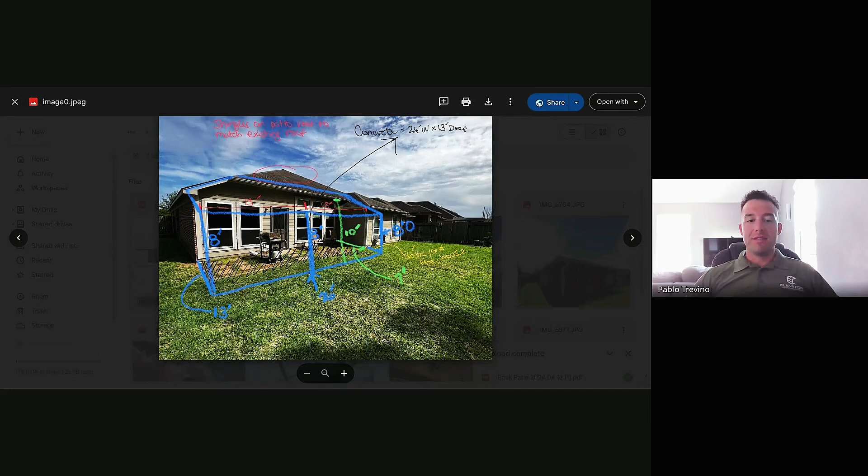The concrete that we laid it all on was stamped concrete. I think the unique thing about this project was, you see a lot of patios with the broom finish with a picture frame layout and stuff like that. Yeah. But it's a unique style of concrete that you can make look like it's brick. You can make it look like it's stone. You can put different colors in it. So that is even better that now I can see that.

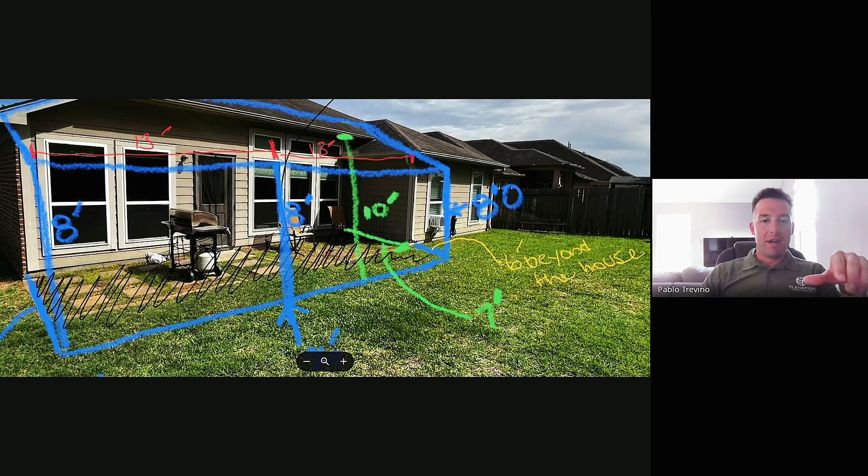So we had our columns that are all right there. Did we do 4 across? We'll see in the photos, but I think we ended up doing 4 columns. Yeah, originally I think we wanted to do without that, but for cost purposes, because of how expensive the beam was to go that distance, we ended up putting an additional post or 2 in there, so that way we didn't have to go with that type of a beam.

Yeah, and as you can see, there's no concrete here, and we typically don't draw out every single project, but as you can see up here, the roof is just so unique. To tie into that roof was complicated, so we wanted to make sure that we had the drawings so our guys can know exactly what they're building towards.

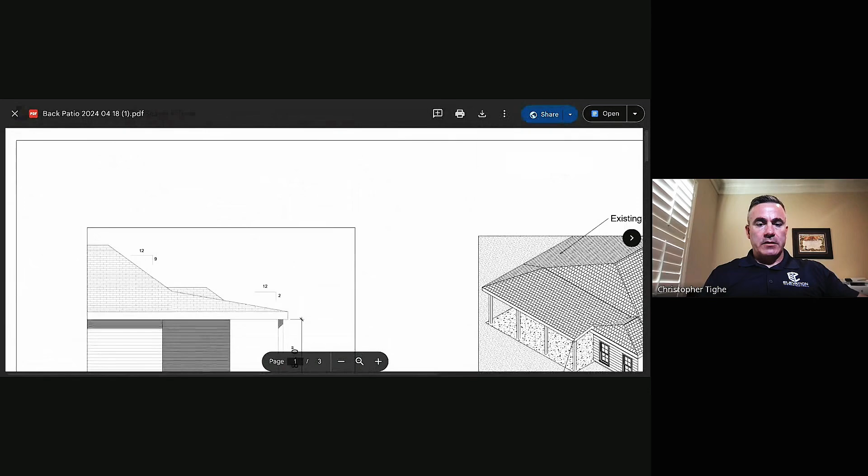Let's see here. So I've got the drawing. Here we go. So here's the drawing. Like I said, we don't do this for every single project, but for this one, we felt it was necessary so we can give it to our team who is actually going to build it, and they can see exactly what we're going to do. So we did the 4 columns right there.

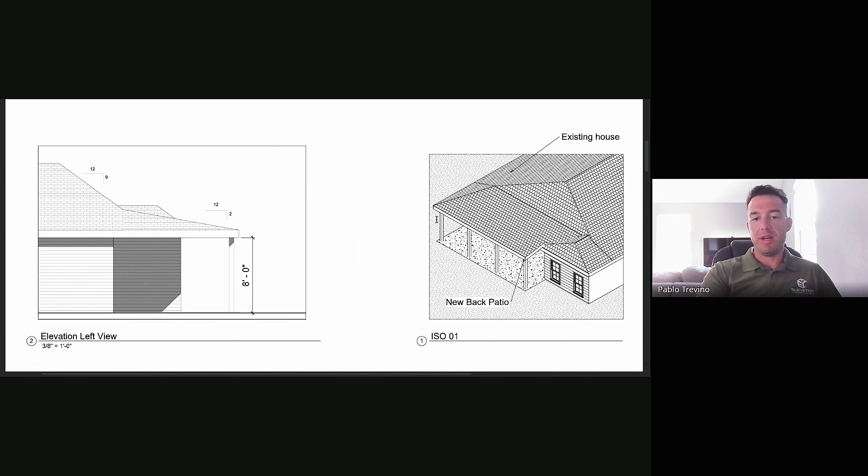Yeah, we did end up doing the 4 columns. I think originally we did want to go with that gable roof, because you see how that roof line splits into 2 faces there. We were going to come up from that top part, but because of the way it was tied in, we ended up just sloping it. So it's still a 2-face roof, but it's a single slope. So it didn't have that triangular shape in the front of it where you have that opening. So we did make that adjustment.

But yeah, it was mainly this overhang right here, that side to the right where you're looking. That was the difficult part, tying into those 2 slopes right there. Yeah.

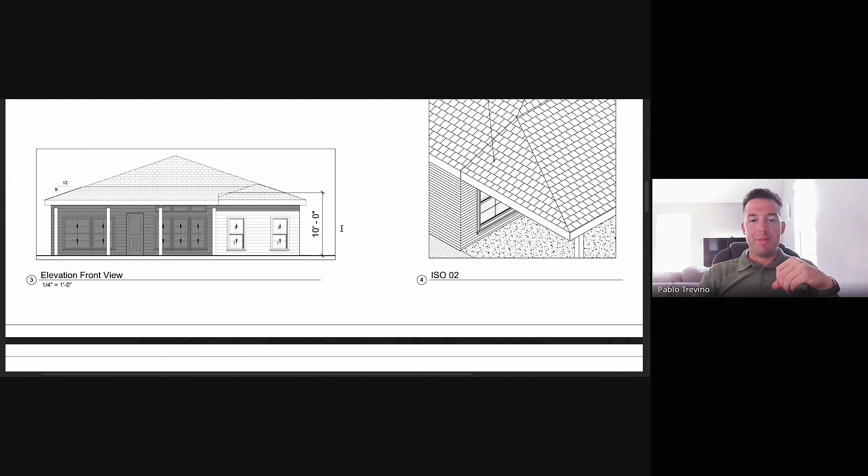And then of course, is designing it properly so that way we can connect the gutters appropriately and do the downspouts and all that and make sure drainage gets away. But yeah, like we had said briefly, we wanted to go with just the 2, but we did end up putting those additional columns in.